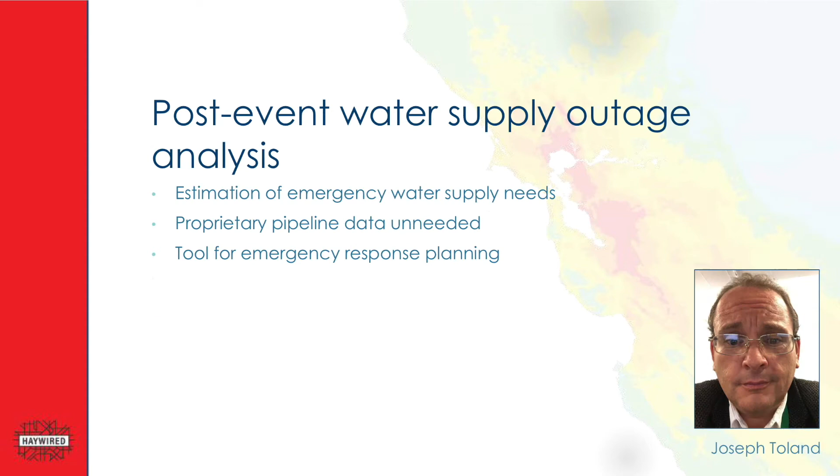Good afternoon. My name is Joseph Toland, and on behalf of my co-author Anne Wein, we're here to present our paper on a simplified method for rapid estimation of emergency water supply needs after earthquakes, which we developed for the Haywired scenario and are showcasing today in the student research panel and the Volume 3 rollout.

In our paper, we develop an innovative approach for the estimation of emergency water supply needs in earthquakes, such as in the Haywired scenario. Our method is performed without proprietary water pipeline infrastructure inventory data, which can be prohibitively time-consuming and coordination-intensive to collect within or after a no-notice earthquake event in a large complex region like the San Francisco Bay Area, which may include over 30 individual utility districts.

Our method allows for estimation of households with emergency water resource needs at an increased precision over other simplified methods, which can be used by emergency managers for targeted resource allocation, rapid assessment, prioritization, and identification of the most severely impacted communities. These precision estimates are also used for ensuring resource access in the most vulnerable communities and communities that might have a disparity for resource access and risk.

Our methodology is based upon the observation that in social implications, we're looking at households that are impacted rather than on the restoration and repair of infrastructure components. So we can bypass the identified infrastructure just by looking at the break rates themselves and utilizing the simplified serviceability functions that allow us to compute water service outage.

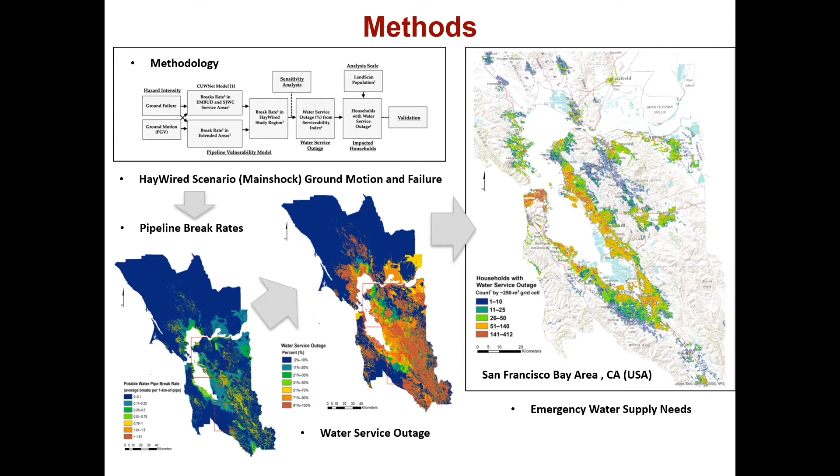In time with the Haywired Volume 3 rollout, our work was published recently in the journal Water and is now available with the USGS Publications Warehouse.

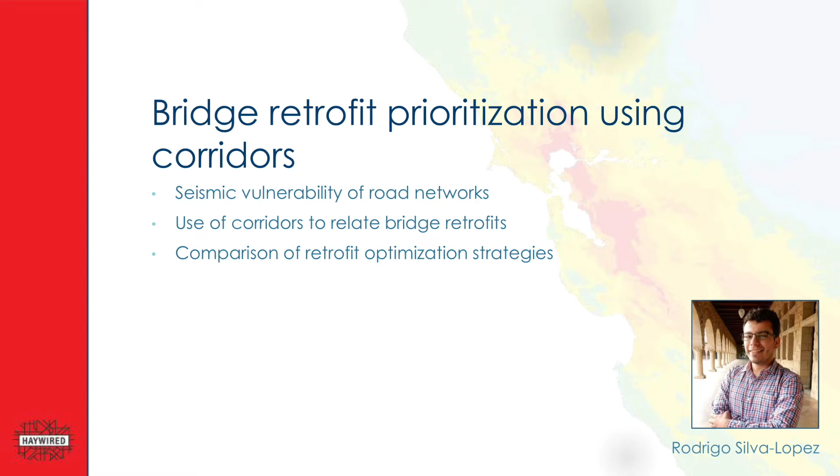showed, and unfortunately it killed 42 people. This happened with an earthquake dozens of miles away from the actual Bay Area. So this makes us wonder what would happen if the Hayward Fault would experience an earthquake.

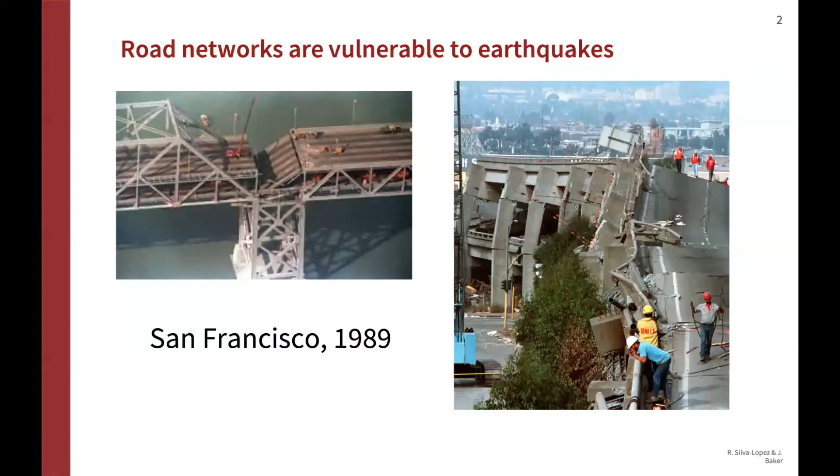Motivated by this, decision makers are actually looking for effective ways to retrofit and manage seismic risk. In that context, in this study, we propose the use of corridors as an effective tool to retrofit bridges. A corridor is a group of bridges that work together.

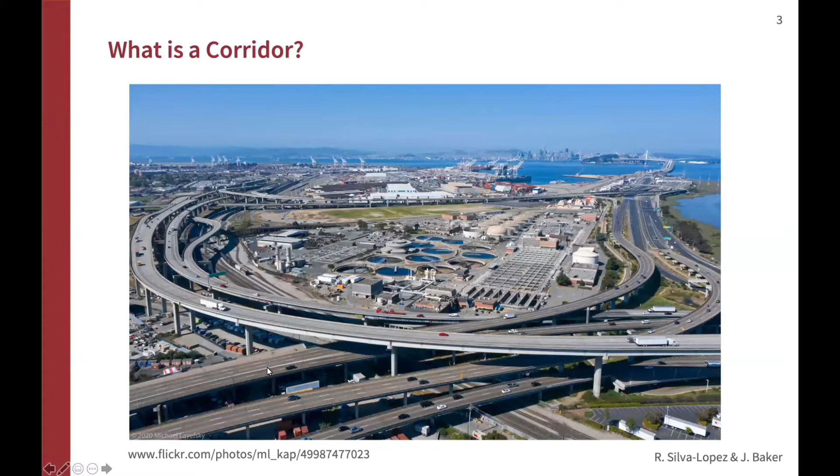Here, we're showing an example of a real-life corridor in which bridges are interlocated with each other and they actually work together. And so this bridge goes over this bridge, and in case this bridge fails, this bridge will also be affected. And in that regard, to minimize risk, both bridges should be retrofitted jointly.

Given that this is an optimization, the optimization that we propose is to minimize the cost of intervention action, which is retrofitting and also repairing bridges after an earthquake, subject to acceptable measures of increasing travel time, and also enforcing that bridges within a corridor should be retrofitted together.

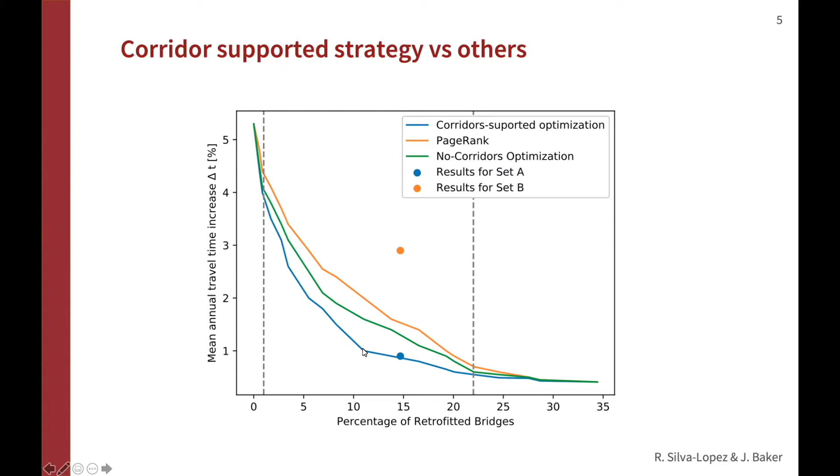When it comes to results, comparing the corridor optimization to other strategies such as PageRank, measure of centrality, and optimization that doesn't use corridors, the corridors perform better for different amounts of retrofitted bridges. As a result of this study, first, corridors capture realistic setups, and also using corridors supported optimization minimizes traffic disruption due to earthquakes. Of course, there are more details in this model.

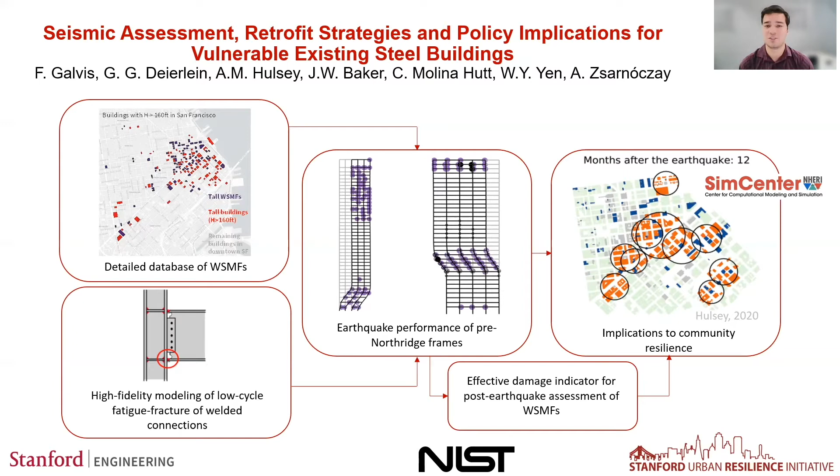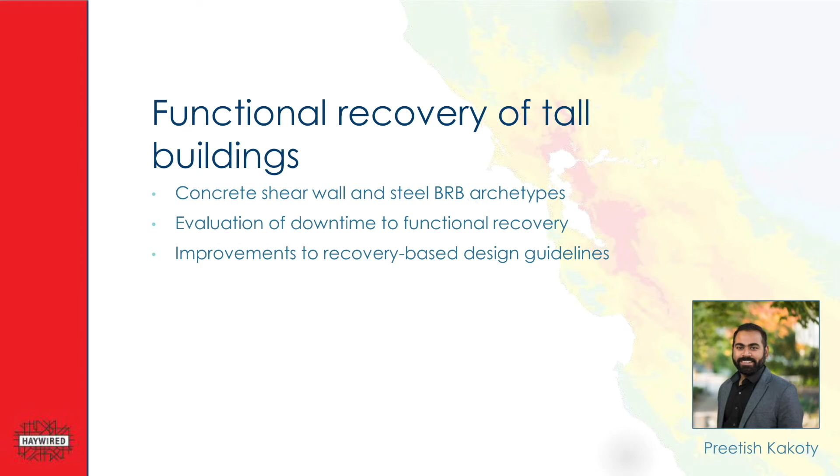Hello everyone, I'm Preetish Kakoty, a PhD candidate at UBC Vancouver, representing the team who contributed to the ATC 119 project for the City and County of San Francisco. And today I'm going to briefly talk about a few highlighting outcomes of this project pertaining to functional recovery performance of tall buildings. In the context of the recently released FEMA P-2090 report, this work provides insights into how tall buildings design criteria relates to functional recovery performance.

We examined the expected performance of two modern archetype buildings, a 42-story reinforced concrete residential building and a 40-story steel buckling restrained brace frame office building in San Francisco.

Both the archetypes are designed following non-prescriptive procedures, and their seismic performance is evaluated for ground motions consistent with design level earthquake as well as risk-targeted maximum considered earthquake. Despite moderate story drift ratios for both these archetypes and acceptable direct repair cost estimates, downtime to functional recovery far exceeds recovery goals set by the city.

Here I'll use results for the RC shear wall archetype for design level earthquake to underline this observation. This archetype for design level earthquake yields story drift ratio of 0.8%, which is less than half of the building code limit, and the estimated repair cost is 7.7% of the building replacement cost. However, the downtime to functional recovery estimate is in the order of 7.5 months, way longer than the tentative recovery goal of weeks.

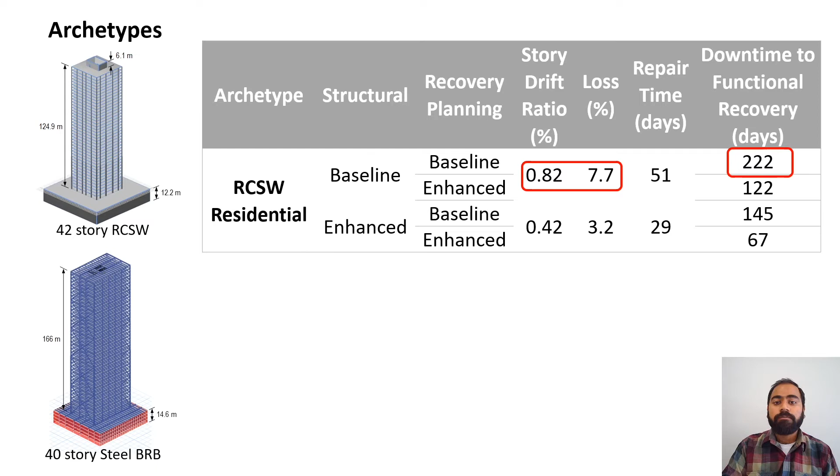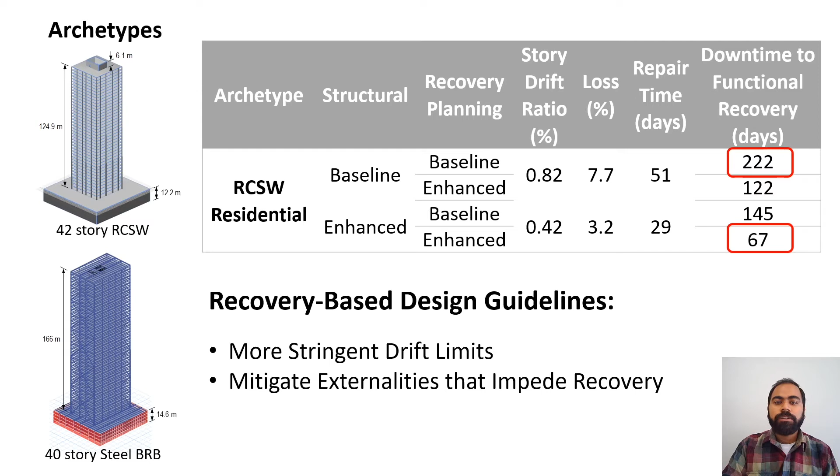To address such extensive downtime, we evaluate the impact of recovery-based design guidelines for reducing recovery times through more stringent drift limits under expected ground motions and measures to mitigate externalities that impede recovery. Implementing both of which reduces the downtime to functional recovery from 7.5 months to just over 2 months.

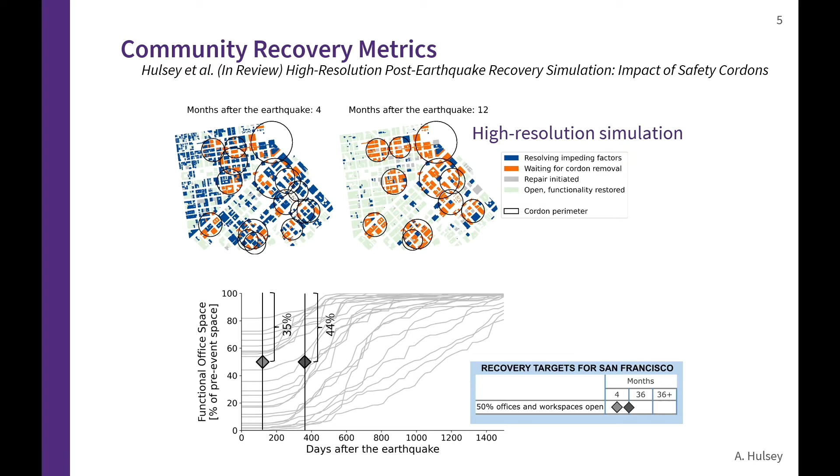We're going to think about this in terms of our recovery targets, which can be plotted on top of these recovery curves. If we count the number of simulations that are above that curve, that's going to give us the probability of achieving this 4-month time target. And we can also do the same thing considering a 12-month target. We can then plot these probabilities of 50% functionality on the x-axis, looking at both the 4 and the 12-month time targets. We can compare this baseline case to what would happen if we ignore the cordons, overestimating our community's recovery. Furthermore, we can look at various mitigation strategies to see how these strategies would improve our probabilities of achieving 50% functionality. But we can also consider the Haywired scenario.

And here we see that the additional distance from our downtown San Francisco site and the reduced magnitude is going to change how the community is going to be affected by this earthquake. We have a higher probability of 50% functionality at the 4 and 12 months than we would have for the larger, closer earthquake. So this framework lets us consider the probability of meeting various time targets, how different mitigation strategies would help to improve those probabilities, and furthermore, how these probabilities would change depending on what earthquake scenario we're looking at.

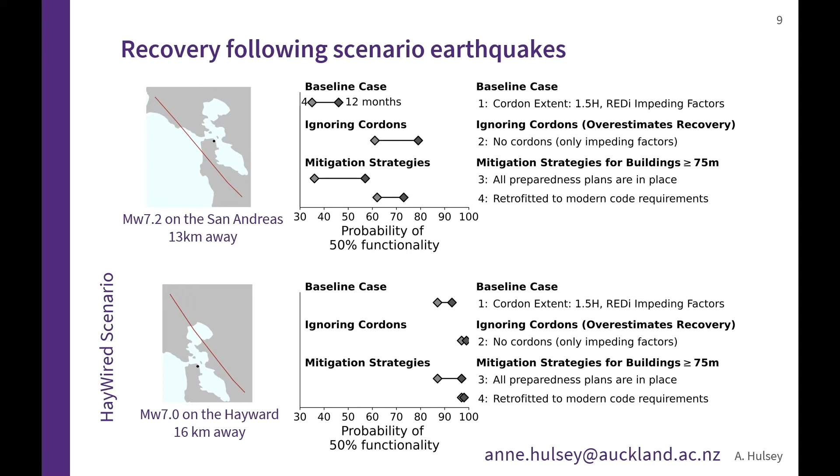Hello, my name is Tamika Bassman. Today, I will be providing you an overview of our recent work studying seismic risk in the city of Alameda, California, from a Haywired scenario rupture event. Alameda is an island city located in the East Bay, with a growing population and aging building stock. Alameda's close proximity to the Hayward Fault, as well as an abundance of man-made, highly liquefiable fill deposits underlying parts of the city, renders seismicity one of the most important hazards the city faces.

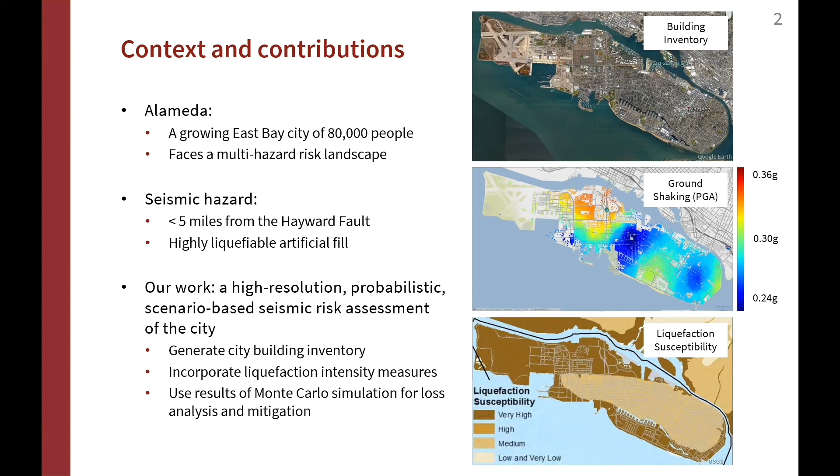Our work comprises a high-fidelity, Monte Carlo-based seismic risk assessment of Alameda using a magnitude 7 Hayward Fault rupture scenario. In the following slides, we will go over 3 aspects of this work regarding building inventory generation, liquefaction hazard simulation, and use cases for high-resolution analysis results.

Generating a high-fidelity building inventory from publicly available datasets poses a number of challenges. Multiple datasets from various sources must be collected to cover all the necessary information. They come in varying file formats and structures and at varying resolution, such as parcel level or census block level.

Uncertainty quantification is required to bring lower resolution datasets up to a higher level of granularity while maintaining reasonable accuracy. Different datasets will also commonly contain conflicting information or have sparsely populated fields, both of which must be handled robustly. The result of overcoming these challenges is a generalizable approach for building inventories that can be applied to other regions.

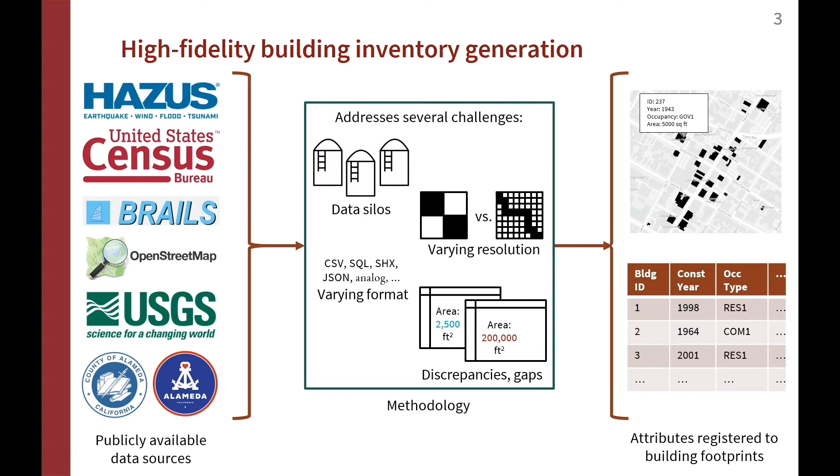We also developed a generalizable approach for incorporating liquefaction into the high-resolution regional hazard simulations. It starts with gathering soil profile and groundwater table elevation data taken from numerous borehole logs across the city. This information is combined with simulated shake maps as inputs to a set of soil mechanics-based calculations to output estimates of liquefaction-induced ground deformation at each borehole location. A spatial interpolation scheme is then employed to arrive at simulated maps of both vertical settlement and lateral spreading at all building locations across the island.

High-resolution results of our probabilistic analysis workflow, such as maps of building damage state across the island, have a number of uses. In addition to the ability to visualize spatial trends in detail, losses can be disaggregated to determine the physical or demographic groups that dominate in terms of severity of consequence. This information can be useful to local stakeholders and decision makers in providing actual numbers that can help rank and prioritize different mitigation measures, and these measures can themselves be modeled directly within the workflow to illustrate their impact on post-disaster consequences.

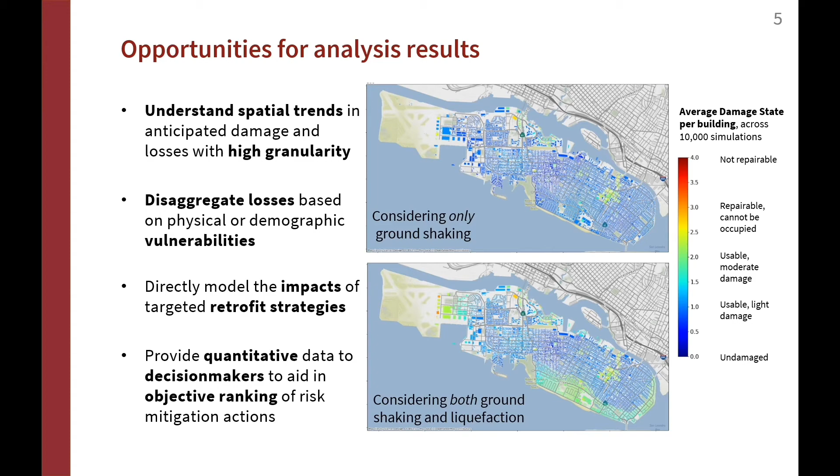The purpose of this project was to create a method for communities to use to understand their vulnerability and resilience in a more comprehensive way. We wanted to explore the interactions between structural vulnerability and social vulnerability to earthquakes. Since policy decisions tend to be made on a city scale, it was important that our analysis could provide high-resolution results. To do this, we created a framework by considering 3 components of vulnerability that affect a community's ability to recover after an earthquake. The first is structural vulnerability, the expected damage to buildings.

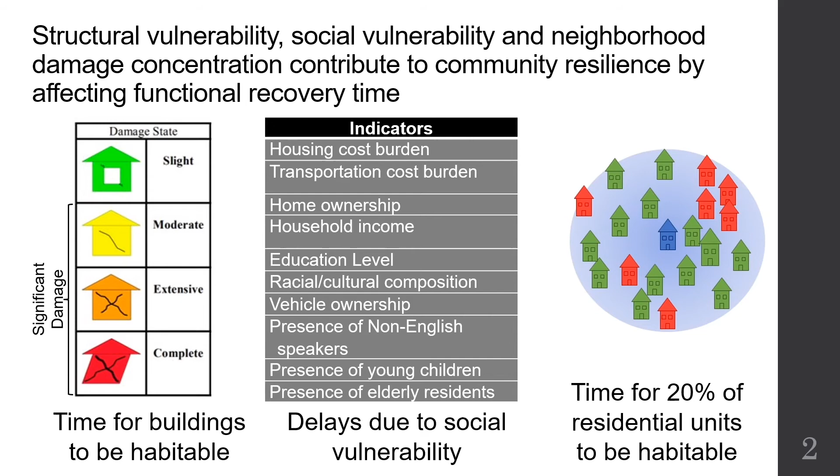The second is social vulnerability, the presence of socioeconomic and demographic characteristics that make some residents more vulnerable than others. And lastly, neighborhood damage concentration. Experts have found that areas with high concentrations of structural damage may see many of their residents choosing to move out of the community rather than completing repairs. To show how this framework can be applied, we conducted a case study in the city of Berkeley, California. For this study, we considered only residential buildings.

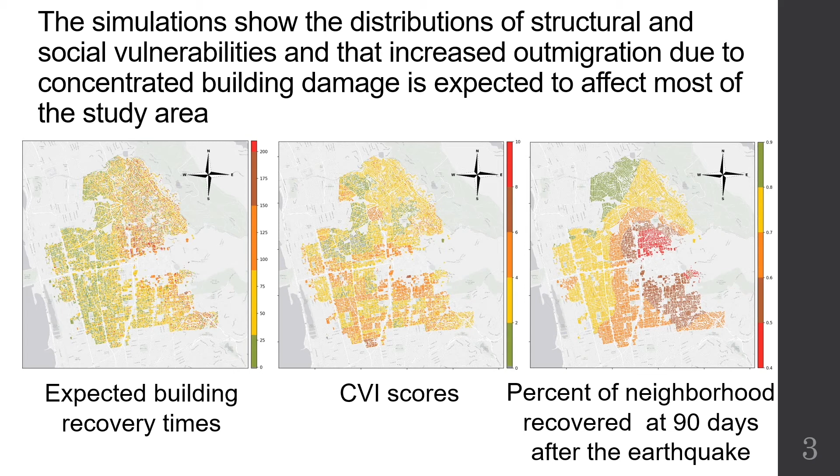On the left, we see that the buildings with the highest expected recovery times are toward the northeast part of the study area. In the center, we see that the most socially vulnerable residents are more towards the southwest part of the study area. Lastly, we see that the majority of the neighborhoods, except for the ones in green in the very north, are at risk of this increased outmigration due to high neighborhood damage concentration.

This analysis can also be used to compare recovery times of various subsets of the population and identify groups that may have disproportionately high recovery times. Here, we see that multifamily homes are expected to have slower recovery times than single-family homes, and that groups such as renters, low-income households, and more socially vulnerable households are expected to have slower recovery than their counterparts. This can be useful in future applications like policy evaluation.

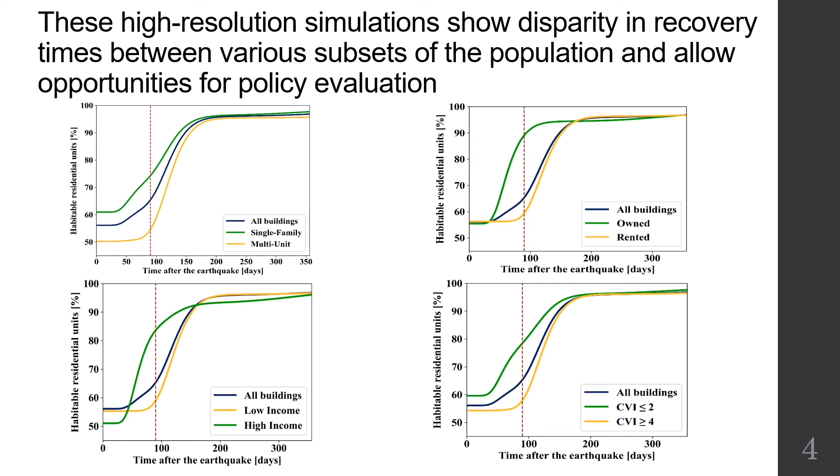For example, a building retrofit policy can be modeled at the structural damage estimation stage, and the resulting recovery times of different groups like the ones shown here can be looked at. This analysis is dependent on the availability of high-resolution, reliable data, which can be difficult to find. However, hopefully this study shows the value of collecting this data for future use.

Hi, my name is Rodrigo Costa, and for the next 2 minutes, I'll tell you how myself and my colleagues here at Stanford integrated place attachment into housing recovery simulations to estimate population losses. This research is motivated by some of the findings from the HayWired scenario. HayWired identified that young and moderate to high income renters are very likely to leave the city after an earthquake because they have the means, they lack the social ties, and they lack the tolerance to stay in a community that has been damaged by an earthquake.

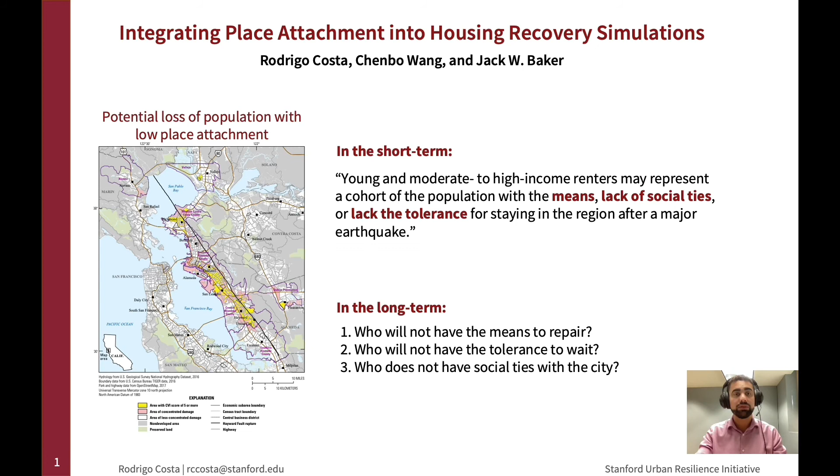But this is all about short term. We wanted to look at the long term. What about during housing recovery? We wanted to also determine who will have the longest recovery times, who will have the highest cost to repair, and what are the demographics of the people that have low place attachment to begin with.

So we used several tools that we have been developing over the several years to simulate recovery. These tools use data such as the hazard maps, data on buildings, and on the demographics of the population in the city, and they output housing recoveries as the ones you're seeing now.

So we applied this model to study housing recovery in San Francisco after a large earthquake on the San Andreas Fault. And the questions we had were, who would have the highest cost recovery, the longest recoveries, and also have low place attachment? Because the combination of these three factors, we propose, will be a good indicator that those households would not be willing to stay in the city during recovery.

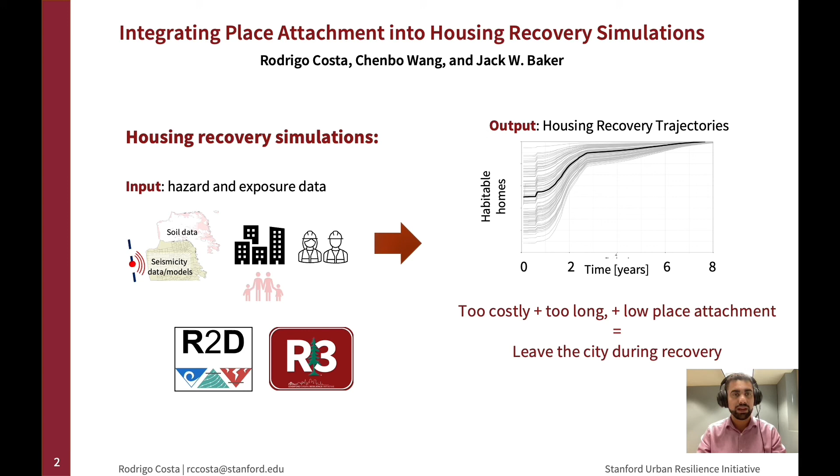Our main findings are summarized in this picture here, where we identified who are the households who will have a costly, long recovery time, and they have low place attachment to begin with. We identified that households that are low income, renters, and who occupy buildings that were built at low code are the most likely to do so.

This highlights the differences between the people that are more likely to leave the community in the short term, identified in the HayWired scenario as high income renters, to in the long-term scenario identified by us as those with low income and who are also renters.

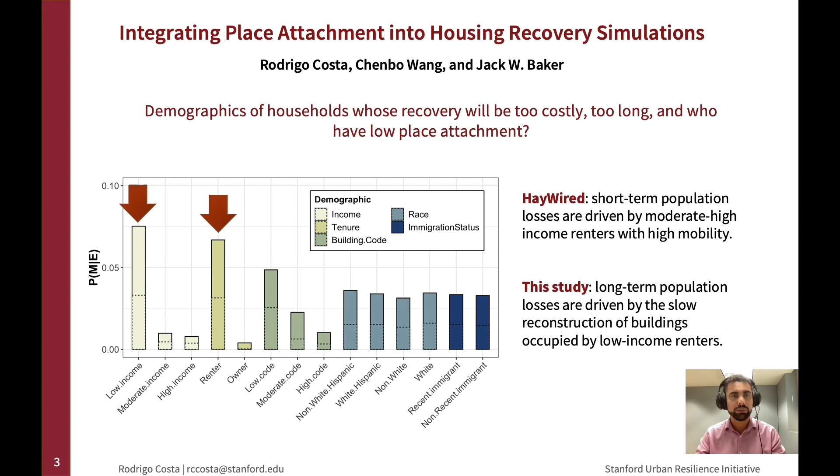Both income and feeling one's voice is heard have impact on decision-making and are positively correlated with frequency volunteering, interacting with more organizations on a regular basis, and attending more community events. Voice having an impact also matters for feeling supported by the local government. If a community or a subset of a community voice is not being heard in the decision-making process, then that

affects disaster preparedness decision-making. If a community or a sub-community is not being heard, then the issues of that community will also not be heard, and government and government agencies will not be aware of the needs and the issues of the community. They will also not be prepared to gather resources or resolve those issues as part of their pre-event disaster preparedness scenarios, which weakens a community's overall resilience and preparedness to face said disaster.

To properly prepare for any disasters, those carrying out the relief efforts must prepare for as many scenarios and issues. So knowing which segment of the community feels unheard will allow those preparing for disaster to make a special effort to understand the issues of the subsection of the community. This will also allow them to better prepare before disaster occurs, which will make all the difference when any disaster situation actually occurs. Thank you.